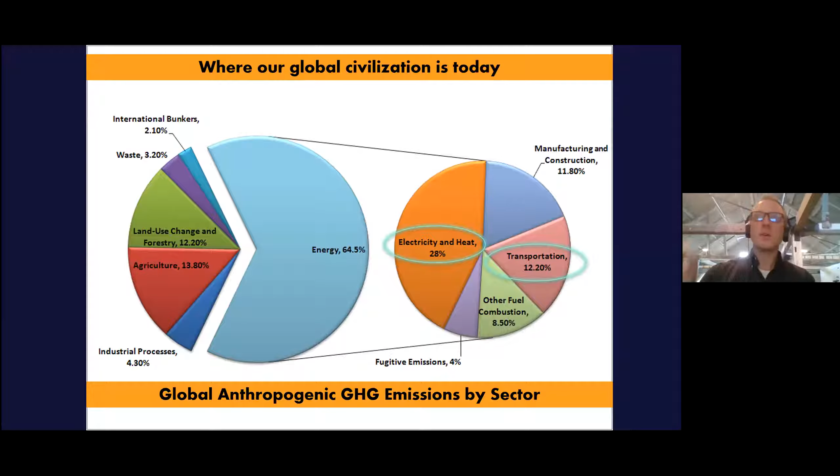Let's talk a little bit about why solar, why renewable energy in general. A lot of this will be stuff that everybody's familiar with, but I'll skim the top real quick, if I may. Global greenhouse gas emissions, the vast majority of that caused by energy usage. Vast majority of that is stuff that we can control, each of us individually. As we see on this pie chart here on the right, electricity and heat and transportation account for a large portion of the greenhouse gas emissions. Those are things that we can all control to a certain extent in our own lives.

The United States, of course, is the biggest contributor. That's not good. It's good to know that as of late, we're committed as a country to changing. It's good to know that we're back in the Paris Climate Accords, for instance. In any case, there are three ways, really, the most powerful ways to reverse those trends: improvements in energy efficiency, electricity decarbonization, and fuel switching. Again, these are all things that each of us can do to a certain extent within our own lives.

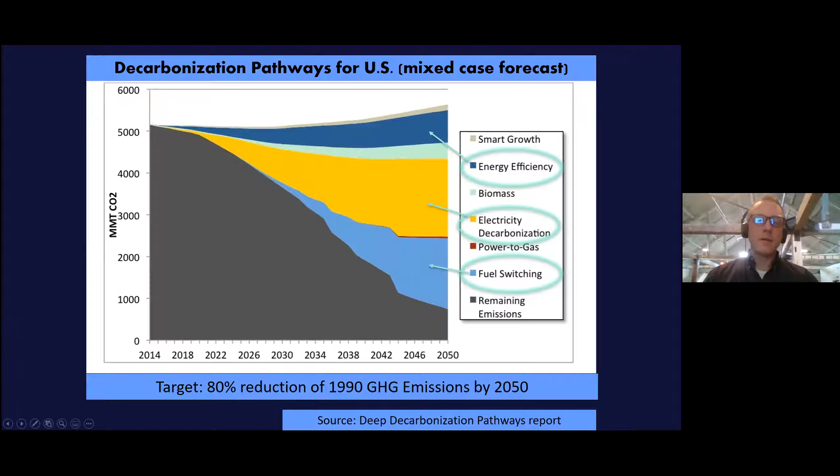Now, if you're building a new high performance home, for example, obviously it's possible to completely electrify, whether that's electric heat, electric cooling, electric domestic hot water, so on and so forth. Maybe if you're already a homeowner with an existing structure, not all of that is possible. But again, the idea here is to electrify the home as much as you can, and then provide as much of that electricity as you can yourself cleanly on site. And obviously there's tremendous economic and environmental benefits to that process. We'll talk more about what the net zero home looks like as we go on, but this is a graphic that at Revision we really like to get out there as much as we can. Again, this is something that's achievable for all of us, certainly.

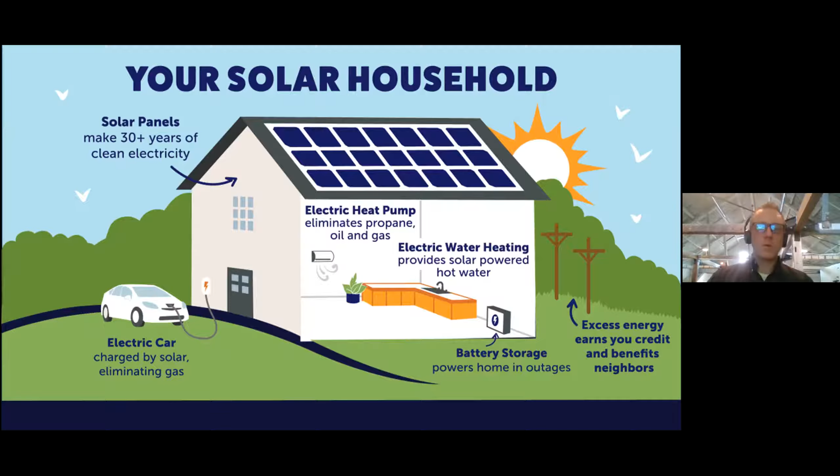Let's talk about the specifics of solar, how to plan for it, what some requirements might be. So the most important of these is a southerly orientation. Now, true south in New England is actually equal to 195 degrees magnetic on the compass. When planning for the siting of your building, if you're within plus or minus 15 degrees of true south, you're going to be in a good position as far as the orientation of the building. That said, even today, with panels that have become far more powerful than in years past, you're able to make up for perhaps a more easterly or a more westerly orientation. So that's not the be all end all, but if you are in a position today to be planning for the siting of your building, within 10, 15 degrees east or west of true south is ideal.

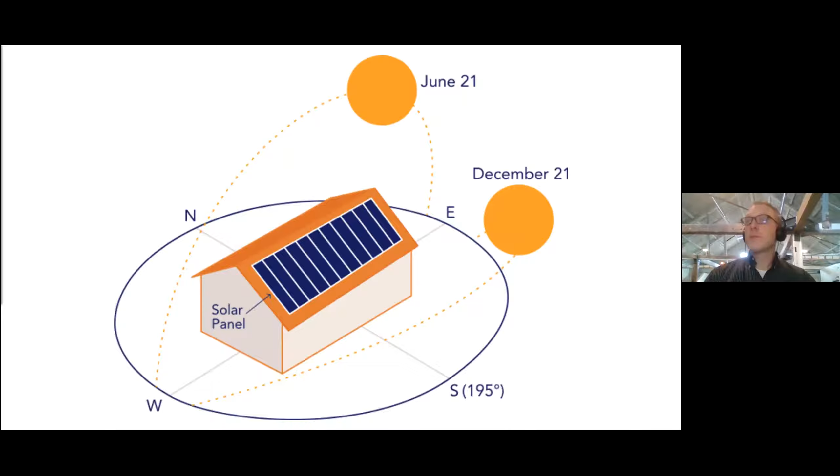Now, mind you, a lot of the stuff we're talking about here, specific to how to plan for solar, is specific to Maine, specific to the Northern Hemisphere, for example. A good example of that is the roof pitch.

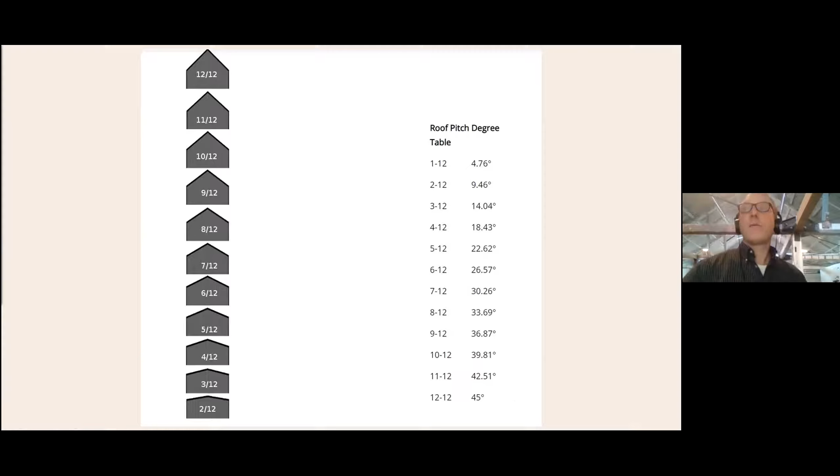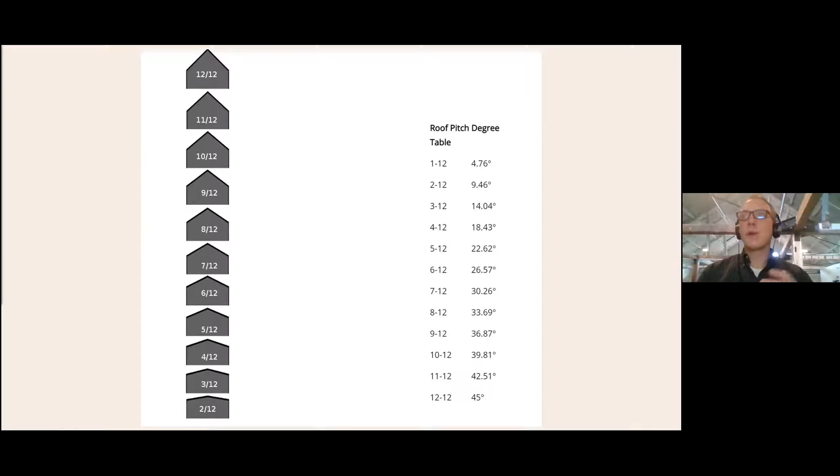Now, perhaps if you're closer to the equator, this might be a little bit different, but here in this location, you want to be somewhere between a 6-12 pitch, around 25 degrees, and 12-12, 45 degrees. Somewhere within that pitch range is where you want to be for your roof. Neither too steep nor overly shallow. Somewhere in the middle is going to give you the best opportunity to collect irradiation all year long. Obviously, more or less depending on the time of year.

In the winter, of course, the sun's much lower on the horizon, so production will certainly dip for all of us this time of year, regardless. But again, if you are in the stage where you're planning for a new home, you want to be somewhere between 6-12 and 12-12 for the roof pitch.

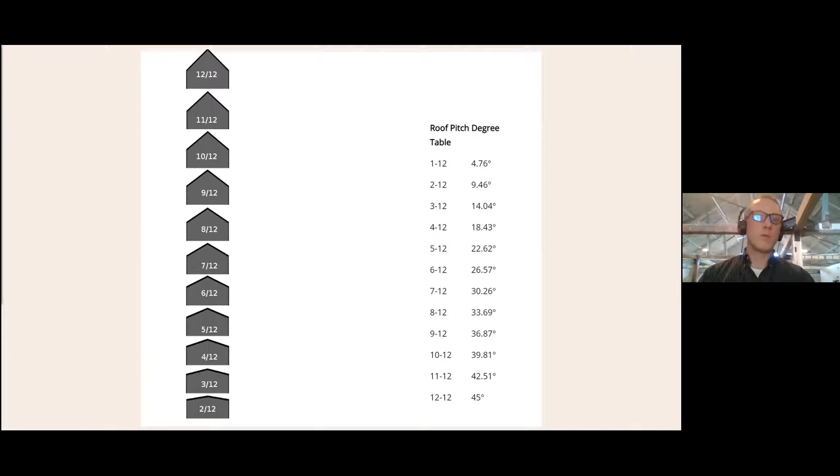And the third factor you want to keep in mind is shade. Now, there's a calculation here that you might consider when trying to determine, do you have a good shade-free site? Alternatively, you could give someone from Revision Energy like myself a call, and we'll come over and not literally hop up on the roof, but we'll get up there and we'll take a shade reading to be sure.

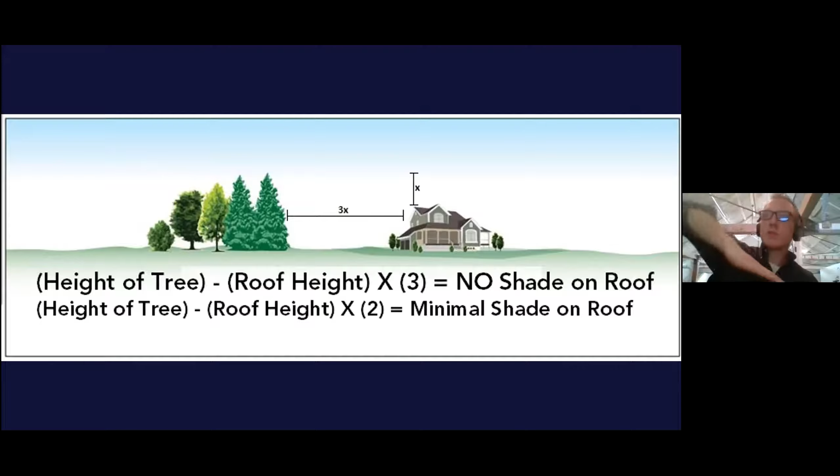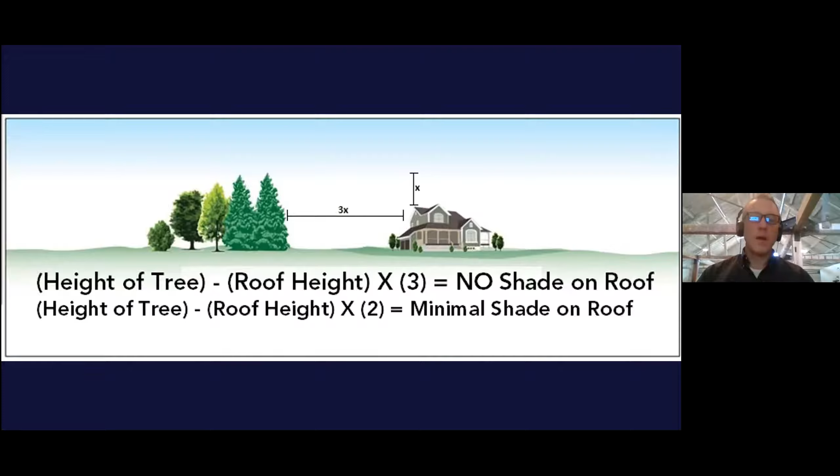Having said all that, I think this is one of those things that most folks have a pretty keen grasp on intuitively. Most of us are able to tell a shady roof from a non-shady roof without much education. But in any case, trees, other buildings, this can really impact the production of a solar system. So you want to plan for southerly orientation, pitch somewhere in the middle, and a more or less shade-free roof. Those are the three factors you want to optimize as best you can when planning for a future solar project.

Now, we're going to talk a little bit about the different types of on-site solar, and about Maine's net metering policy as well. And this ties into backup batteries as well. A bit of a deep dive here, bear with me if you can. I'll also mention that there are off-site solar possibilities, for example, community solar farms, which is something Revision offers. That's a conversation for another time. But if you'd like to learn more about community solar, which is basically off-site solar, meaning there's no panels on your roof, take a look at our website or shoot me an email.

In any case, the three types of on-site solar power: off-grid, which is you'll have solar panels, some kind of battery backup, and you're not tied to the utility in any way. That's something a lot of folks are interested in at least learning more about. And to be candid with you, in general, that's maybe not the best bet. It could be a bit of a toss-up if you're building a new home really out there in the woods, and the cost of having CMP bring power to that location is going to be prohibitive, like over 25 grand, then at that point you may consider an off-grid home.

But to be very clear with you, because of our seasonal variation in solar production here in Maine, throughout the winter you're not going to be producing an awful lot of electricity. So you need a very robust and likely quite expensive battery bank of some kind, coupled with burning something for heat. You're going to have to burn something. So off-grid, a lot of folks have that ideal in mind, but in practice it doesn't always pan out. Now, something that might work a little bit better, believe it or not, is grid-tied.

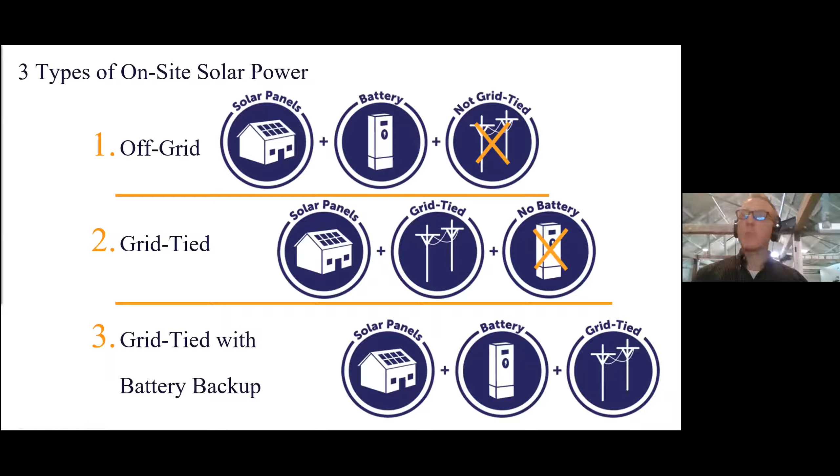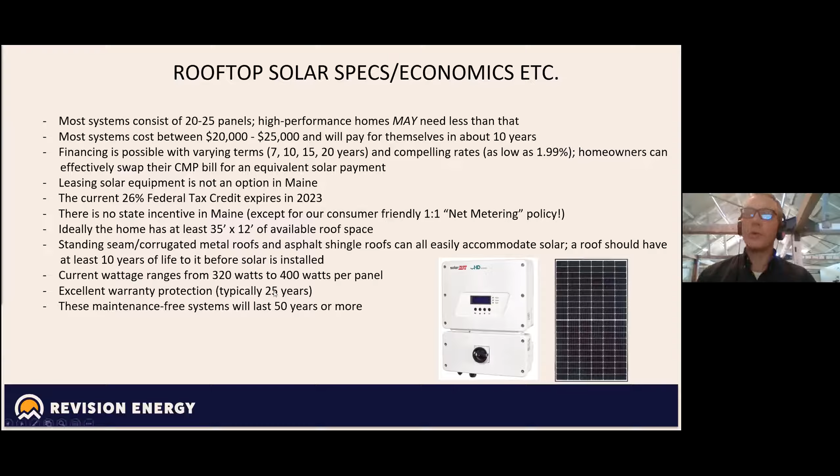A heat pump water heater is the best option for that. In my opinion, this is something that absolutely every homeowner should own if they don't already. On the previous slide, we saw again an outdoor condenser there on the right and the corresponding indoor unit. With a heat pump water heater, there's actually no outdoor equipment. That condenser sits right at the top of the very well insulated tank.

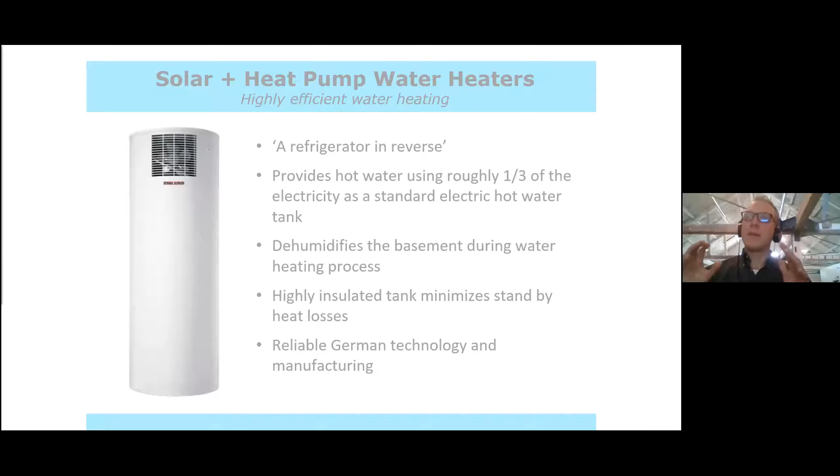And this is not only the most affordable way to get your domestic hot water year round, it also dehumidifies. So most of us might have this equipment in the basement, and in New England, dehumidification in the basement is generally a good thing to have. This investment will pay for itself exceptionally quickly. Both heat pumps for space heating and cooling, as well as heat pumps for hot water, currently have a great rebate through the state. So these are things that you definitely want to consider in order to pursue that, again, electrified home that solar offsets.

So basically, this is a way to make it so that your home becomes a sort of microgrid in the event of a grid outage, right? So your solar is producing power, which is charging up the battery, and that battery system, depending on its size, could be running either the whole house or perhaps a select series of critical loads, right? Well pump, maybe some fossil fuel hot water, fridge, these sorts of things. So again, you can certainly consider this as a solution to take the place of a generator, to make your home be solar powered even during a grid outage via battery backup.

Solar with a battery compares very favorably to generators, at least as far as the sort of wheel-around 5 kilowatt variety that you would plug in to an inlet on the exterior of your home, as opposed to those where they might be certainly noisy, there's no automatic transfer, you have to fuel them up, so on and so forth. The battery is just much more convenient. There's no refueling, there's no maintenance. It's much like solar, sort of what we consider to be a set it and forget it technology.

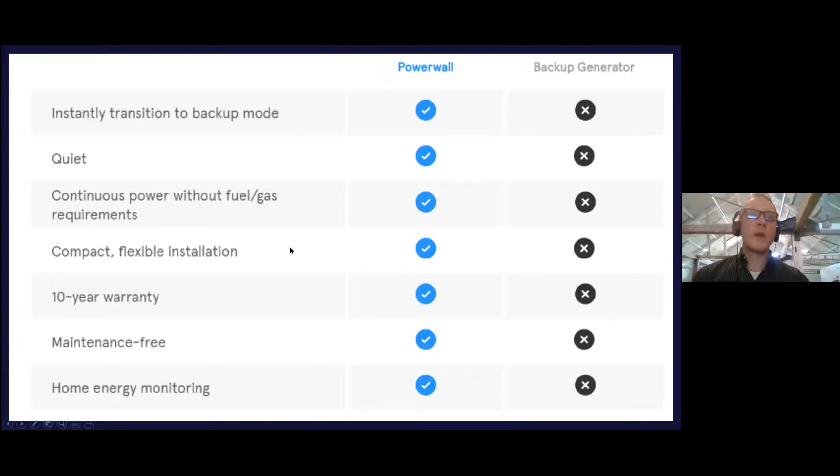And the idea of finding space for an additional 10 panels on the roof is certainly not unheard of. So again, you can truly pursue today the complete electrification of your home and your transportation and provide all the power that you need for that yourself cleanly up on the roof. The idea being to electrify everything and provide that electricity cleanly with renewables, ideally solar, wind, so on and so forth. Now, there's a broader picture to the renewable energy transition, on a grid scale, right? So that doesn't just mean pursuing renewable sources.

It also means making the infrastructure itself more sophisticated, more demand responsive. And of course, storage needs to be a part of that. The smart grid of the future has a lot of ins, a lot of outs, right? Different sources, whether hydro, solar, what have you. And then, as I said, a more improved infrastructure. There needs to be demand responsiveness.

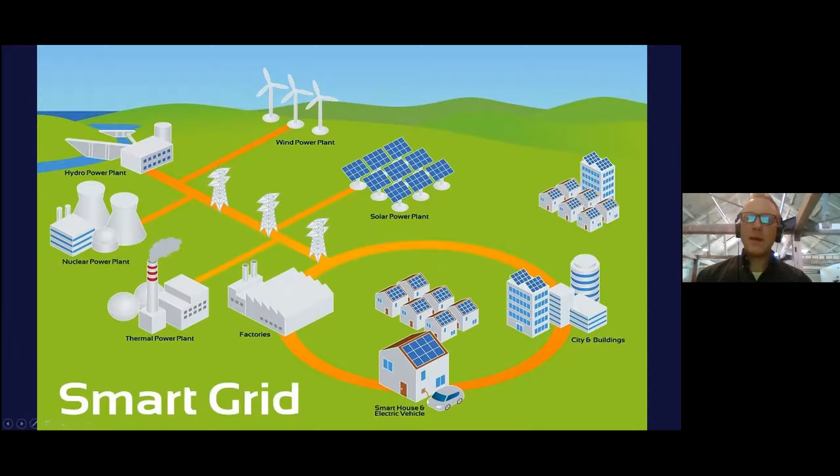And that'll certainly happen. I mean, these are all variable sources. Depending on the part of the world, time of day, renewables aren't always predictable. So again, some sort of demand responsiveness, moving power from here to there, a smart grid. That's what we'll certainly have to pivot towards in order to complete the renewable energy transition.

Again, I said we'd get topical. We can talk a little bit about what happened in Texas. Certainly a lot of ins and outs there, but there wasn't a huge amount of renewable penetration. Some of the renewable energy did fail when the bad weather hit. But just as importantly, the thermal power plants failed as well. And that represented a far larger chunk of the overall power.

And in addition to that, of course, there was no storage really to speak of whatsoever, no reserves, if you will. And the lack of sophistication of that grid meant that there wasn't any sort of responsiveness to this huge increase in demand. So again, that's a topical example of how a less sophisticated grid can really let us down in these sorts of emergency situations.

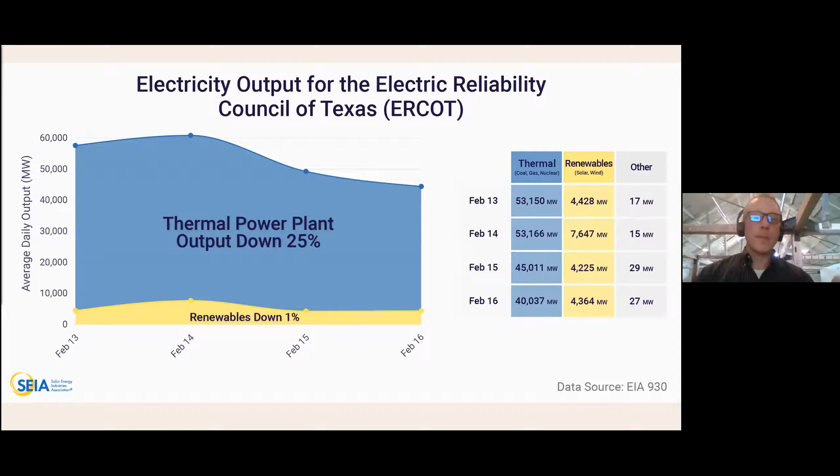Anyway, there's a way around it for all of us, and that's the 100% solar household, high performance home coupled with solar. And as far as expense, it's certainly possible to not only get yourself away from the more expensive model that we're seeing vis-a-vis fossil fuels, but if you have a very tight, high performance home, then the notion of even spending less on your energy upfront is possible as well.